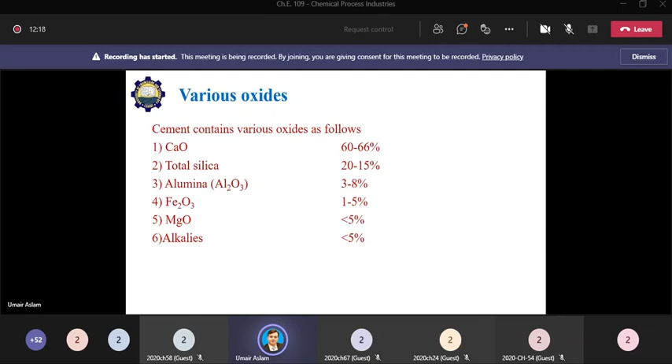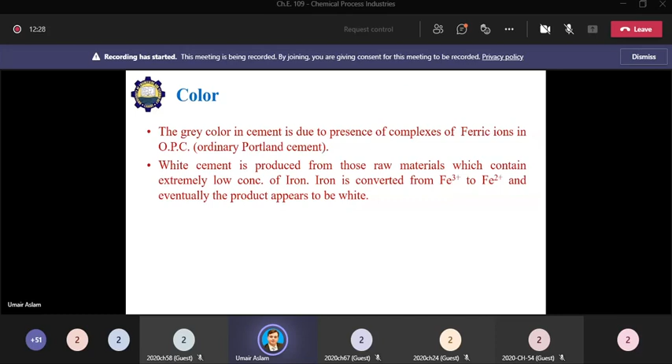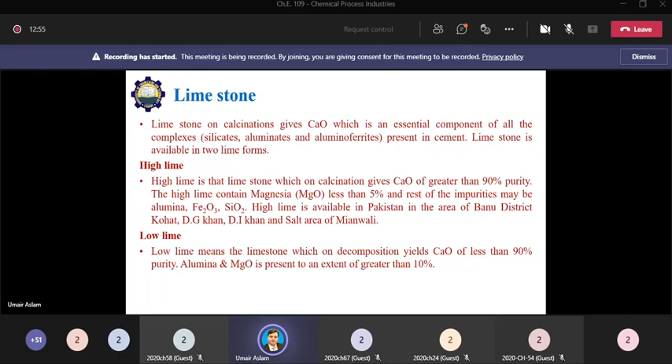Raw materials include limestone, clay and gypsum. Limestone, obviously we want our reactants to have high purity and they should have a very low amount of impurities. Accordingly, this affects the product quality. Fortunately, Pakistan has high lime reserves, so all cement plants in Pakistan use high lime, meaning limestone having greater than 90% calcium oxide.

Clay is the second important raw material for cement manufacturing, and as per requirement it should have high silica contents, and it should have low alkali and alumina contents.

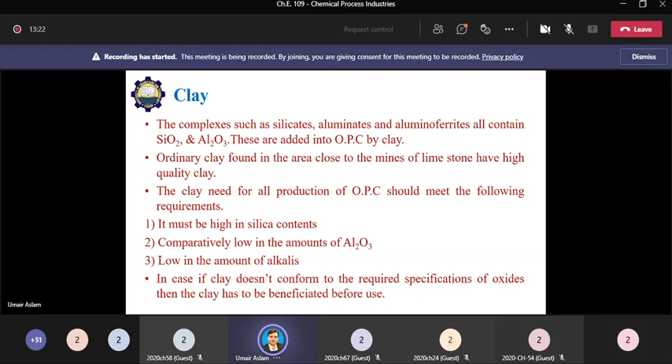Gypsum is the third major raw material, although added in very minute amount, but it is a very important component in cement manufacturing, as it delays the hardening process of cement. If we do not add gypsum in cement, as we all know, whenever there is construction and we use cement, we mix water in cement and apply it on walls. If gypsum is not present, as soon as we add water in the cement, it will rapidly harden.

It will very quickly convert into solid hard form if gypsum is not present. So we will not be able to apply it on any surface, or the finish of the surface will be very poor, its outlook will be very poor. That is why we add gypsum in the cement.

It basically delays the hardening process of the cement. From this delay we get the benefit that we can easily transport the cement, for multi-story buildings, and we can apply cement easily onto the structure, onto wall surfaces, and give it any kind of shape as well. So it helps us in the application of cement, that is gypsum.

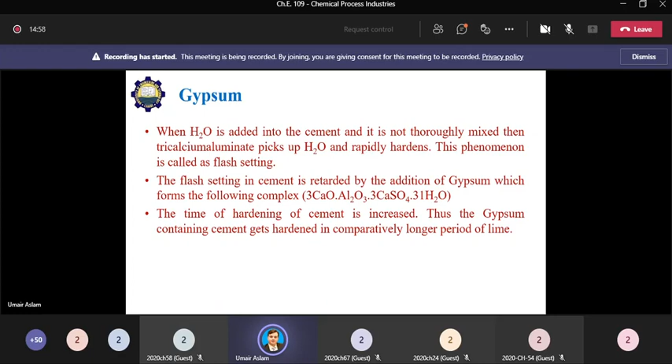Then fuel, as cement is synthesized with the help of a rotary kiln, a reactor, and for conversion of raw material into cement, we require very high temperature. To get such high temperature, we need to burn fuel. The combustion of fuel generates flue gases at high temperature, and the heat available in these high temperature gases is then used to cook the reactants to get cement.

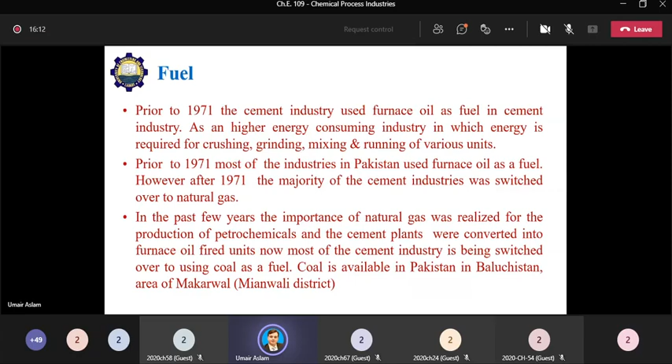Initially furnace oil was used as fuel in the industry, but because of its high cost, now we have to look for other options. One option is coal. Naturally available coal in Pakistan is of very low quality, so either we have to import high quality coal, or if we want to use this low quality Pakistani coal, we have to add a post treatment section. The objective of this treatment section would be to remove all impurities moving with flue gases, those flue gases generated from combustion of coal.

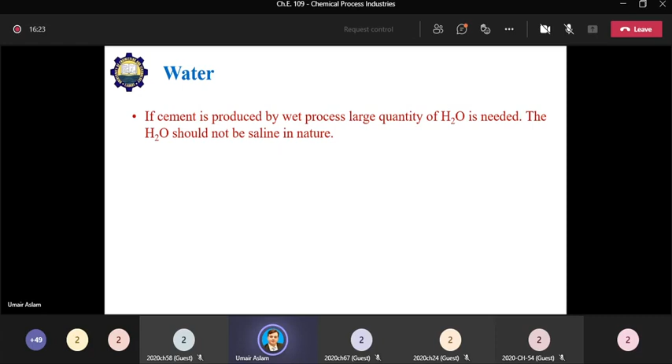If we are using wet process, then water will also be a major raw material there. So these are different steps involved in production of cement. Firstly, we have to crush and grind the raw materials, clay and limestone. Then we have to mix them, and get a homogeneous mass, a homogeneous mixture, uniform composition mixture, and their mixing is also performed in a grinding machine.

Then we have to transport this grinded mixture, raw material mixture, into the rotary kiln, where these raw materials will be cooked and converted into cement. At this point the cement is known as clinker. Then in the final step, we grind clinkers in presence of gypsum. As a result, we get our final cement product.

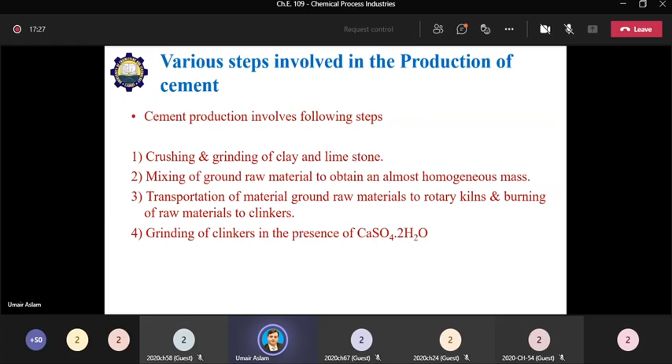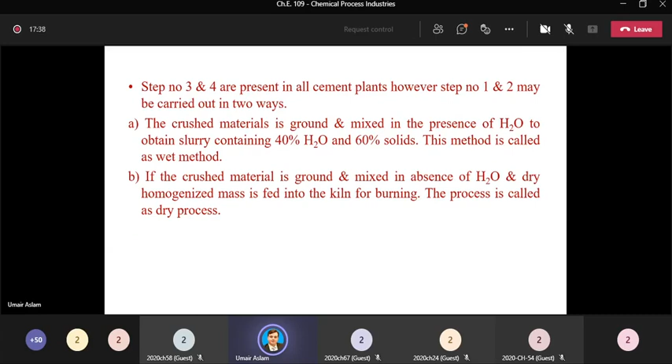If we are using water, having a wet cement manufacturing process, then the first two steps - crushing and grinding - will be performed in presence of water. This mixture of water and solids is known as slurry, where water is 40% by weight while solids are 60% by weight.

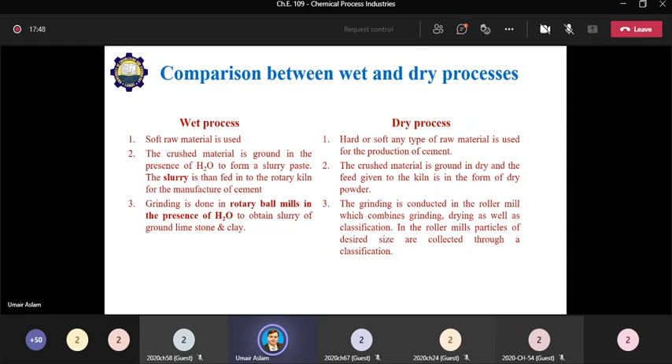Then there is a comparison between wet and dry process. Every process has its own pros and cons, so depending upon availability of funds and investment, we can select either process. In wet process, there is no or very minute particulate matter pollution. In dry process, particulate matter pollution is of very high level, so we have to add a particulate matter capture section in the dry process.

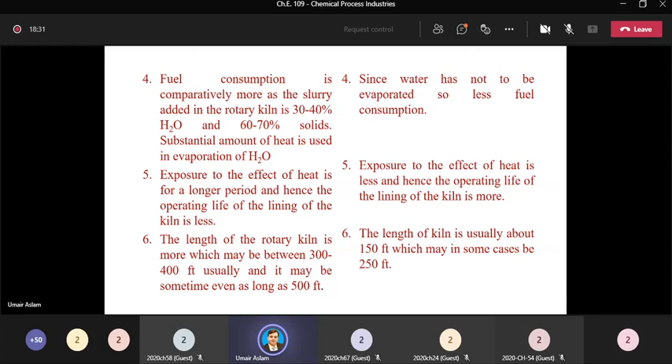Then comes the processing steps. The first is crushing and grinding of clay or limestone. Especially in case of limestone, it is found where there are mountains or rocks. We have to obtain limestone from that source. Clay sources are also present in areas which are rocky in nature. We have to excavate the deposits of limestone and clay.

Then we transport these rocks of clay and limestone to the plant, and at the plant the crushing and grinding of these raw materials will start.

As you may have noticed, cement is physically a very fine powder material, so we have to grind our raw materials to a very fine size. This cannot be performed in a single step. We perform crushing and grinding in more than one step so that we can divide the load. As a result, the size of crusher and grinder becomes such that we can control these equipments well, and they do not occupy huge space on the plant site.

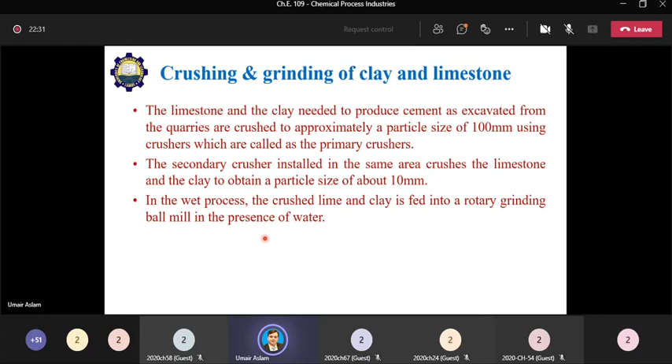So mixing is performed during the size reduction of solid particles. If we have a wet process, we get a slurry - solid in liquid. If we have a dry process, we get a homogeneous uniform mixture of solids. In slurry, water content is up to 40%, while solid content can be up to 60 to 70%. It all depends on the processing condition of the plant or kiln where we perform heat treatment.

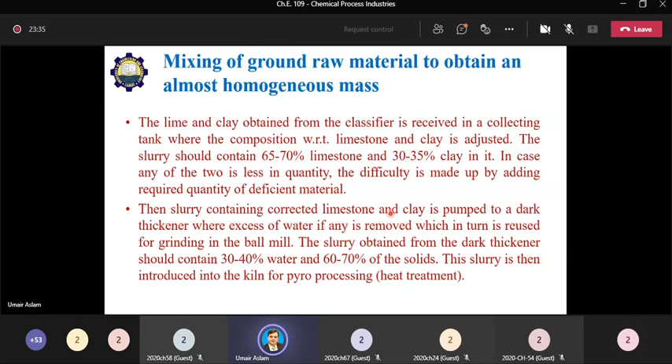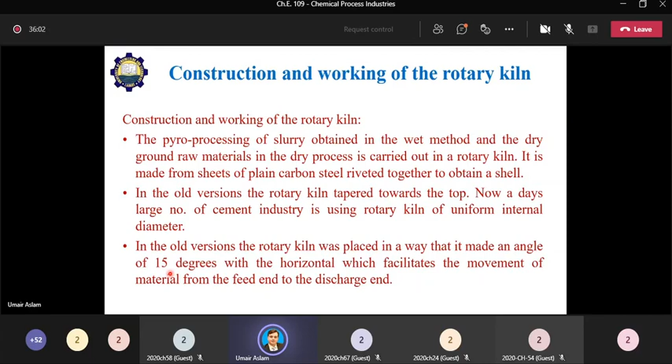So there will be an inclination so that we can have easy movement of the solid material. Initially it was 15 degree, then it was reduced to 5 to 6 degree, and the movement of the solids was then controlled with the help of chain conveyor. इनके इंक्लिनेशन भी स्लाइटली दी हुई है, एंड देन उसके अंदर हमने चेन कन्वेयर भी इंस्टॉल किया हुआ है।

Chain are also rotating, conveyor is also moving, and because of this inclination the movement of solid material also becomes very easy. The kiln is also rotating at a very low RPM, 1 to 3 RPM.

The rotation is given to the rotary kiln so that we can ensure homogeneous mixing, or homogeneous uniform reaction within the material. Because if the kiln will not be rotating, the surface of the material which is exposed to the flue gas...

The material present on that surface will react and get converted into clinker, while the material present in the bulk below the surface will not have direct contact with the flue gases, तो उसको वो टेम्परेचर ही नहीं मिल पाएगा, तो वो सीमेंट में कन्वर्ट ही नहीं हो पाएगा। So that is why we have to provide rotation so that the material is offset up and down to ensure complete interaction of solid material with the hot flue gases, ताकि हर पार्टिकल तक, हर सॉलिड तक वो हीट पहुंचे और वो रिएक्ट कर सके।

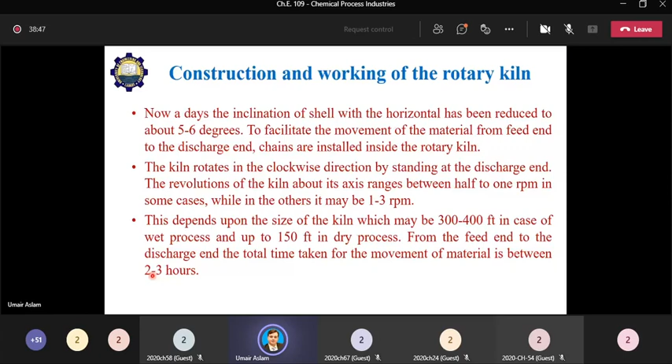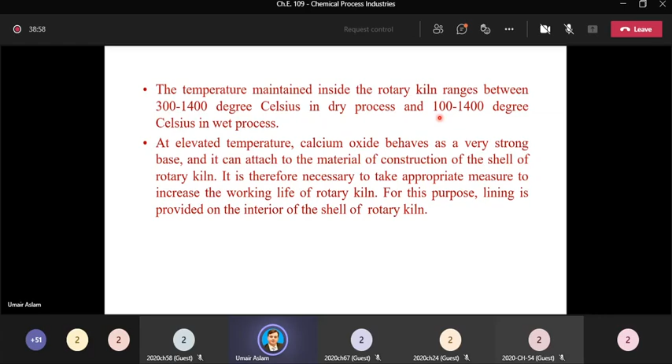As I told you before, usually the temperature range in case of dry process is 300 to 1400 degrees C, and in case of wet process it is 100 to 1400 degrees C.

We have to provide lining. Lining is provided on the interior surface of the rotary kiln so that first of all the material can sustain this high temperature. Secondly, it also acts as an insulator, so it will not allow heat to transfer from the inner side of the rotary kiln to the environment. So it will maintain high temperature, increase the life of the rotary kiln material, and act as an insulator so heat from inside does not escape to the environment.

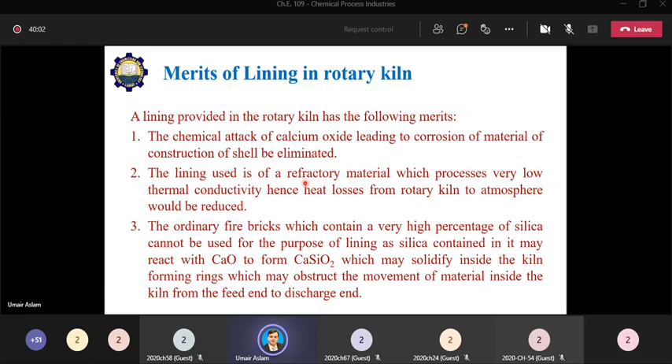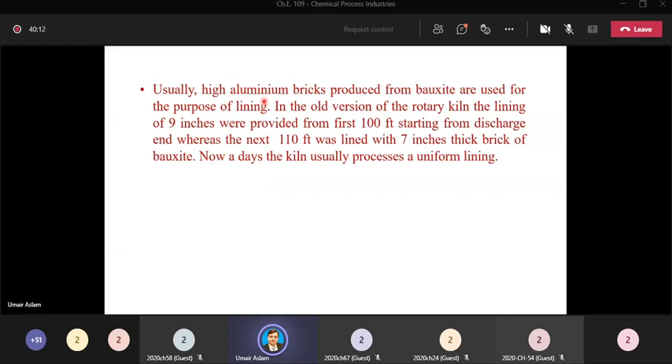Now comes the reaction zone with respect to temperature available in the rotary kiln. In 100 to 300 degree C temperature range, mainly evaporation or vaporization of water takes place. Then in 300 to 600 degree C, chemically bound moisture evaporates and some decomposition of carbonates also starts. In the temperature range of 400 up to 900 degree C, if there is any organic matter, its combustion will start.

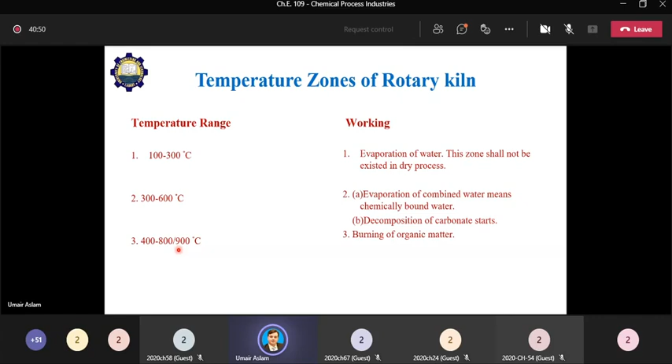In 600 to 900 degree C temperature range, volatilization of alkalis, chlorides, and evolution of CO2, meaning decomposition of calcium carbonate, takes place. In the temperature range of 900 to 1200 degree C, this is the main reaction zone, between lime and clay.

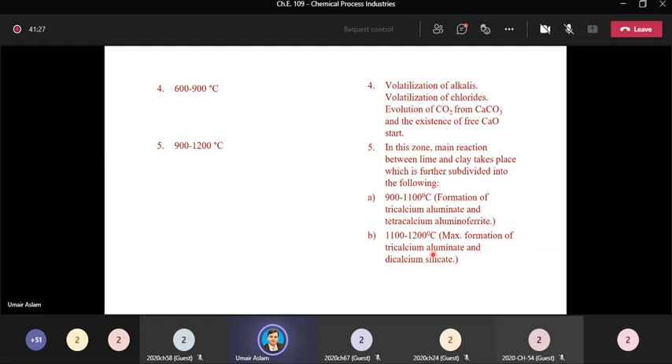Between 900 to 1100 degree C, formation of tricalcium aluminate and tetracalcium aluminoferrite takes place. And in case of 1100 to 1200 degree C, maximum formation of tricalcium aluminate and dicalcium silicate takes place.

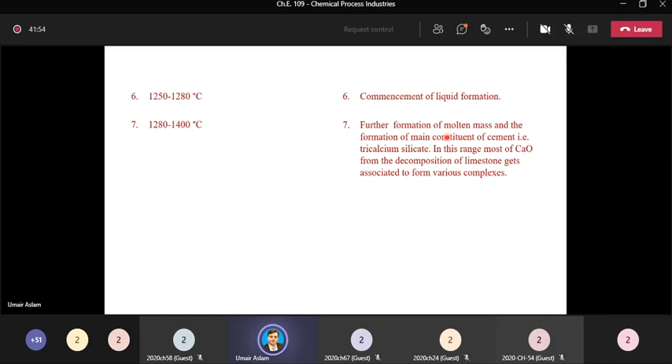In the sixth temperature range, 1250 to 1280 degree C, the cement formed starts melting, commencement of liquid formation. And in the last temperature range, 1280 to 1400 degree C, the material is completely melted, and then it comes out from the rotary kiln in the form of molten liquid.

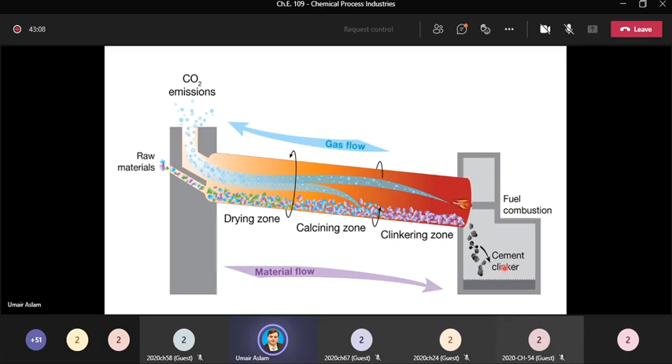Then these clinkers, also the molten liquid falls down, we cool it, and we get cement clinkers at this end of the rotary kiln. Now clinkers are like this shape, large size balls.

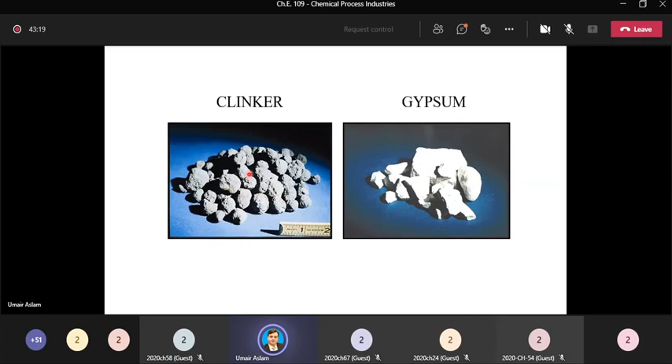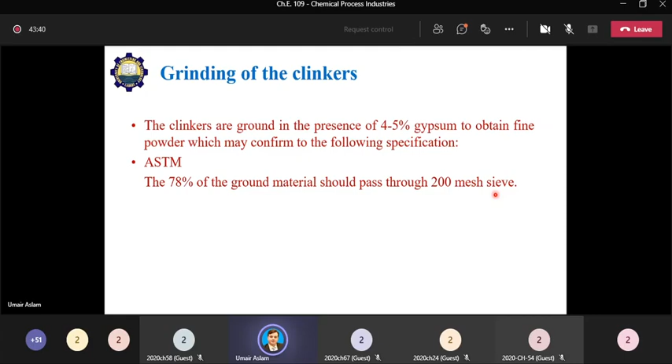Then these clinkers are mixed with gypsum and grinded. We usually add 4 to 5% gypsum in the final product of cement, and then gypsum and clinkers are grinded, and the standard is that 78% of that grinded material should pass through a 200 mesh sieve. It's a very fine size particle. So after this grinding we get cement, which is then sent to shipping, packing and bagging section. So this is the complete explanation of the process.

If you guys have any question, please ask. Class, any question? No sir, it's clear.